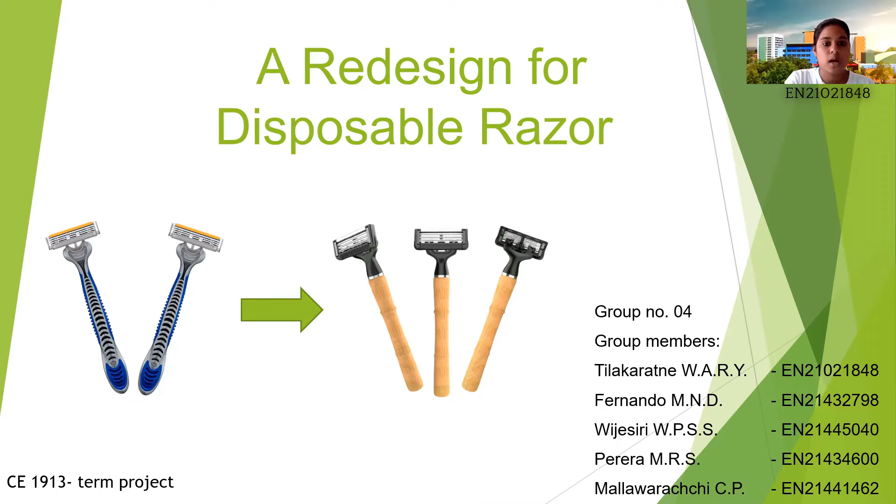If I ask you a question, what is a razor? A razor is a keen-edged cutting instrument which is used for shaving and cutting unwanted hair on humans' bodies. This was invented by William Henson in 1847 and developed to the standard which we can see today.

When the time period of usage is over, it has been disposed of or thrown away, and this has become a threat to the environment. So the importance of the project we have initiated is to give you a creation which is long-lasting and environmentally friendly.

Moving to the next slide, we all know that there are two main parts of the razor: the handle and the blades.

As you can see, the plastic part of the handle consists of polystyrene and polyphenylene oxide, which includes 8 to 12%, and polypropylene, 35 to 45%. The rubber part consists of 2-methyl-1,3-butadiene, which includes 8 to 12%, and all four are renewable.

In the blade, chromium gives you 12 to 14%, all the other elements only include below 1%, and every metal is non-renewable. The packaging is done by cardboard, which includes only 7%, and it is renewable.

The properties of the elements are corrosion resistance, toughness, and lightweight. Corrosion resistant means the ability to withstand the falling of natural properties of materials in the presence of high levels of moisture. Toughness gives you the meaning of the capability to hold the shape of the blade without deforming or bending.

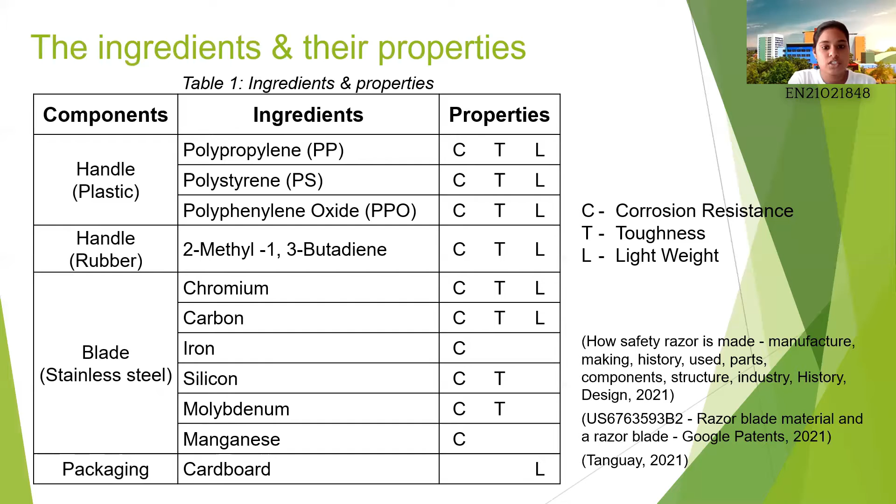Lightweight helps us with ease of handling. The next slide is about how the manufacturing process is being done. Over to you, Netra.

Thank you, Ravindi. So while we are talking about how disposable razors are made, there are three main steps available: handle manufacturing, blade manufacturing, and assembly.

In the handle manufacturing part, first the raw materials such as polystyrene, polypropylene, and polyphenylene oxide are heated at high temperature. Second, this heated mixture was injected into molds. After cooling these molds, the handles were formed.

However, as a result of heating these materials, methane and carbon dioxide gases were released to the atmosphere. Also, scrap plastic was released to the environment as a byproduct of the injecting process. Moving to the next slide.

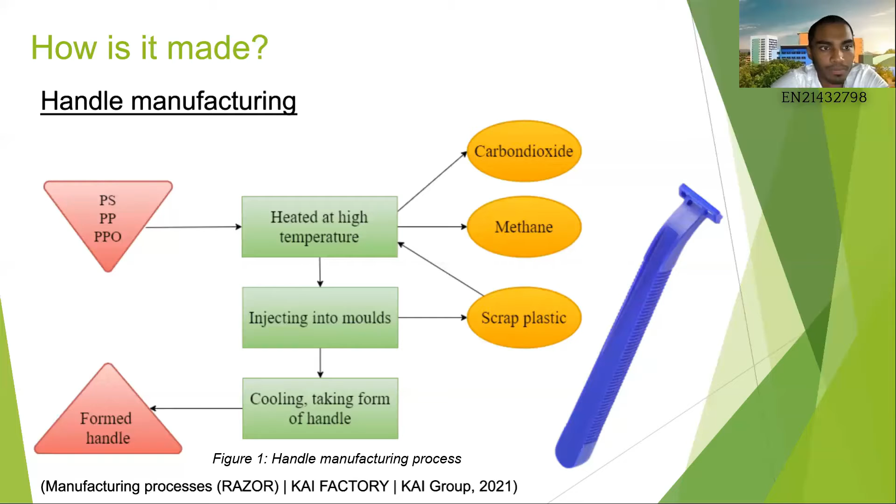In the blade manufacturing part, the first step is heating raw materials at high temperature. Here, molybdenum, chromium, iron ore, silicon, and nickel are used as materials.

After the heating process, the mixture was sent through the argon-oxygen decarburization process. In this process, argon and oxygen gases were injected into the mixture. However, as a result of this decarburization process, carbon dioxide gas was emitted to the atmosphere.

Next, the mixture was formed into stainless steel sheets. After forming the metal sheets, they were sent through the cold rolling process.

In this process, sheet metal is introduced between rollers and then compressed and squeezed. Then the annealing process began, and this process was done to the metal sheet to increase its elasticity.

So after all these processes were done, the blade is formed by cutting, shaping, and surface finishing processes. But scrap stainless steel is released as a byproduct of cutting and shaping processes. Moving to the next slide.

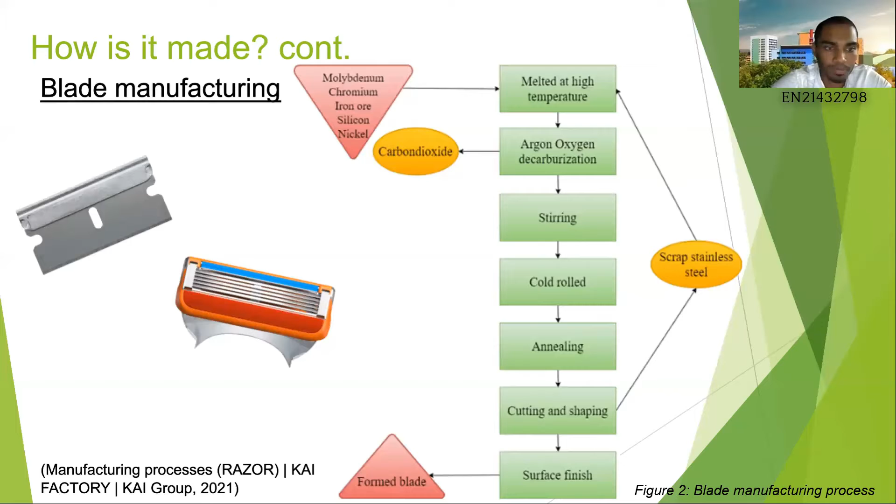So the third main step is assembling. In the assembling process, the formed handle and blades are assembled together and disposable razors are produced. Moving to the next slide.

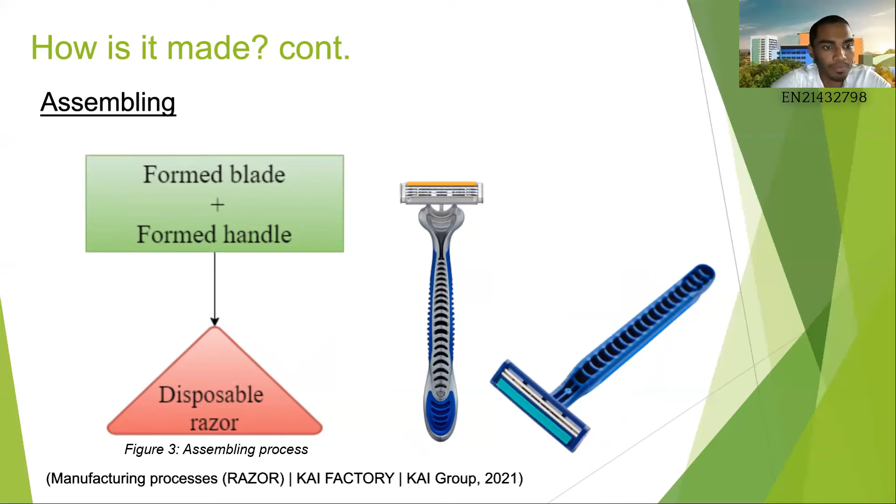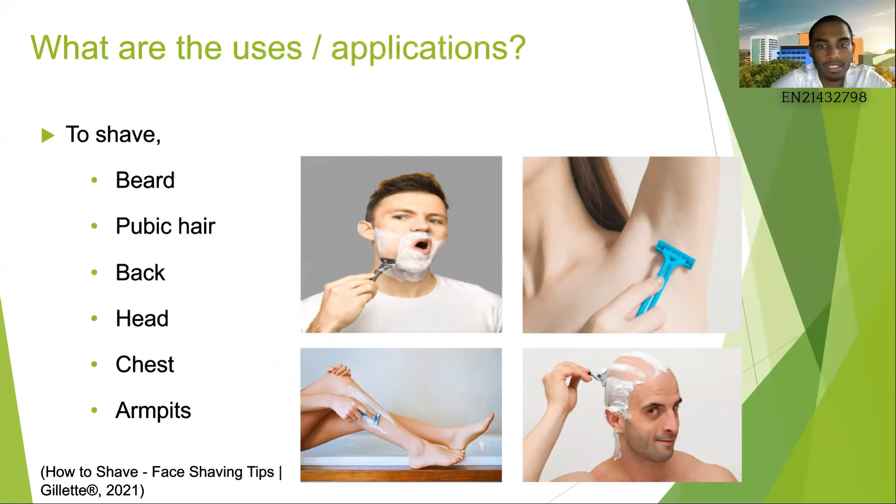As we all know, the main use of a disposable razor is shaving. However, we can use it to shave our beard, pubic hair, back, head, chest, or armpits. So I'd like to invite Sachinta to continue our presentation.

Thank you, Netra. I will explain to you the problems that can occur in each production stage of the existing disposable razor and when discarding it. Raw material extraction and processing.

Due to digging the ground to extract minerals, topsoil gets removed. Therefore, it leads to soil erosion and water sources get polluted due to not discharging wastewater properly. Resources get depleted due to a higher rate of extraction than they get replenished.

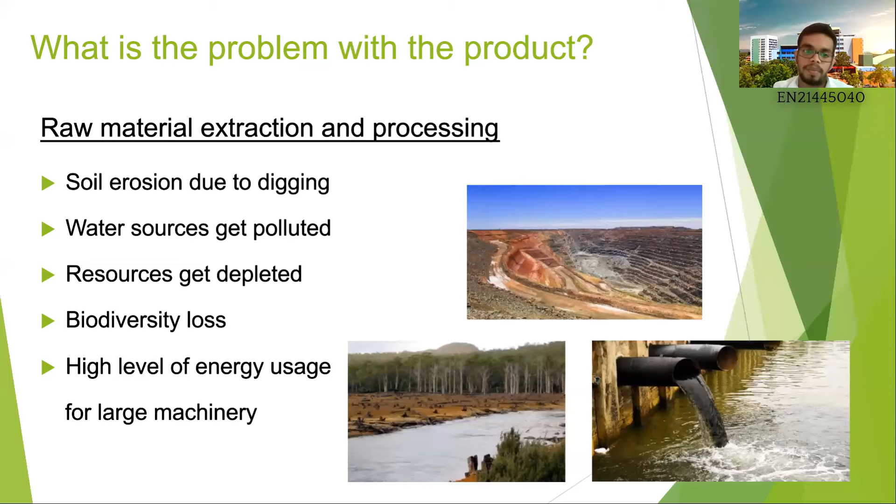Destruction of habitat is the main component of biodiversity loss, but direct poisoning caused by mine-extracted minerals and indirect poisoning through food and water can also affect animals, vegetation, and microorganisms. High levels of energy usage for large machinery during the processing of mine material. Let's look at the production of the blade stage.

Air pollution due to carbon dioxide emission from the argon oxygen decarburization process. Land pollution due to discharge of scrap stainless steel generated while cutting and sharpening the blade. The harsh noise of machines will harm animals as well as humans.

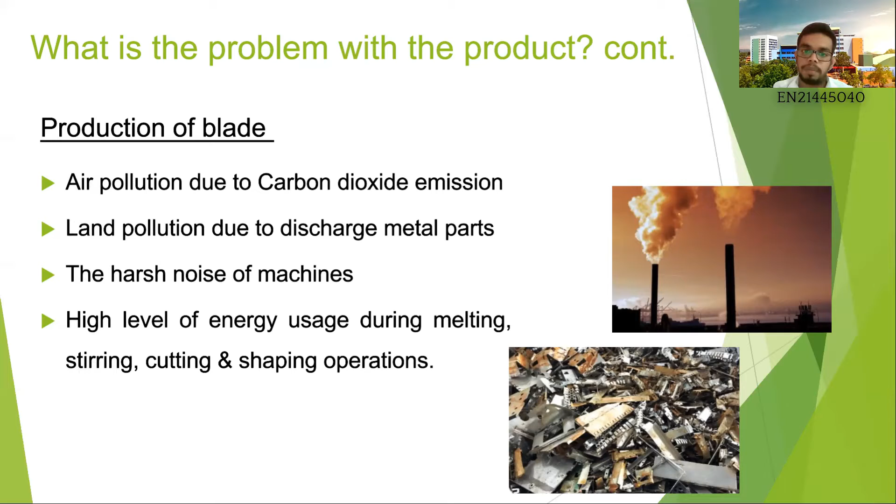As described in the above stage, high levels of energy are used here as well during melting, stirring, cutting, and shaping operations. Another important part is manufacturing the plastic handle. Let's identify the problems that arise there.

Air pollution due to carbon dioxide and methane released from the high heated raw materials such as polystyrene, polypropylene, and polyphenylene oxide. Land and water pollution due to discharged scrap plastic. High level of energy usage for heating and injecting into the mold process.

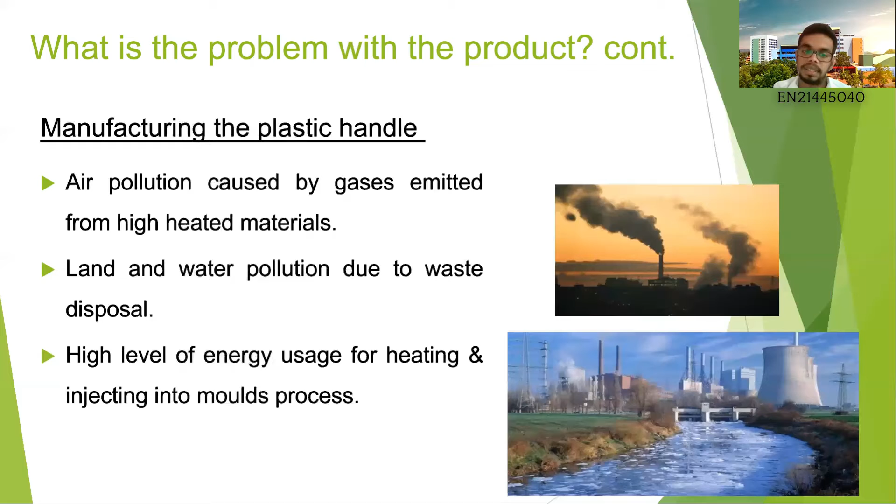Finally, we identified two major problems of disposing of the razor. Those are land and water pollution due to direct disposal of plastic parts and blades, and air pollution because of releasing toxic gases when burning plastic parts and polythene retail packages.

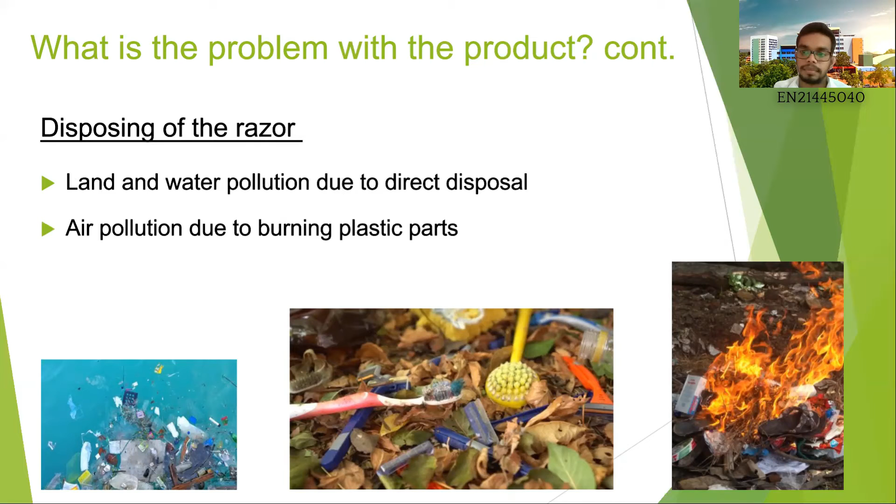Thank you, Sachinta. So what are the available alternatives to the existing product? As the first alternative solution, we suggest stiff cardboard and discarded wood for the handle. Stiff cardboard and discarded wood are fully eco-friendly materials.

Next, the lubricant strip. The lubricant strip is a small tiny part of the razor near the blades, as you can see in our slides. We hope to redesign the razor to remove the lubricant strip when it gets worn out and replace it with a new lubricant strip. This will bring the razor into the reusable level.

So moving into packaging. Retail packaging has done huge negative impact to the world. So we propose to use recyclable cardboard, organic fabrics, and biodegradable packaging to minimize the harmful effects done to the environment. Our main aim is to minimize the amount of solid waste dumped into the environment.

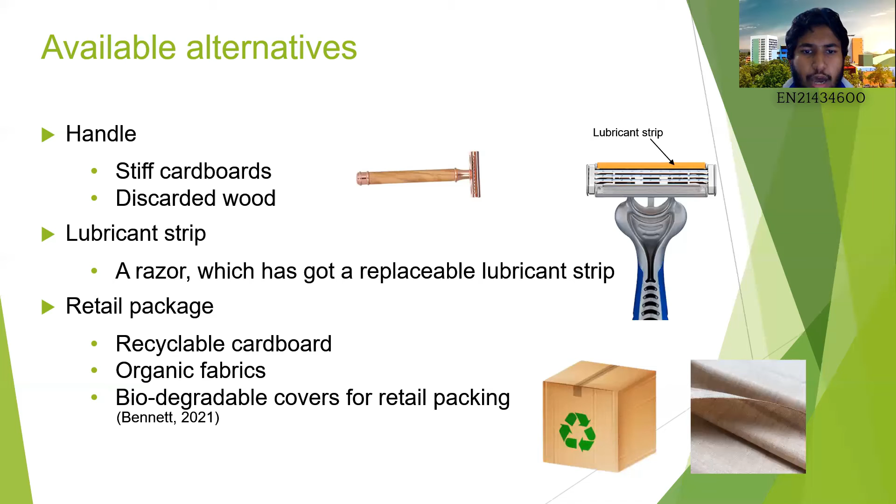So moving into the proposed alternative slide. Basically, we are planning three alternatives. We hope to replace the plastic handle with discarded wood. Why did we choose this alternative? Mainly, disposing of plastic scrap adds more waste to the land and water.

Also, we plan to replace the lubricant strip. It will be beneficial economically and will reduce environmental pollution. Now we will see how it affects the environment. When we extract raw materials, it directly affects soil erosion and water resources.

At last, we're trying to use biodegradable packaging rather than retail packaging. Biodegradable packages are compostable. This also minimizes the toxic gases added to the atmosphere due to the burning of polythene and reduces the non-perishable waste added to the environment.

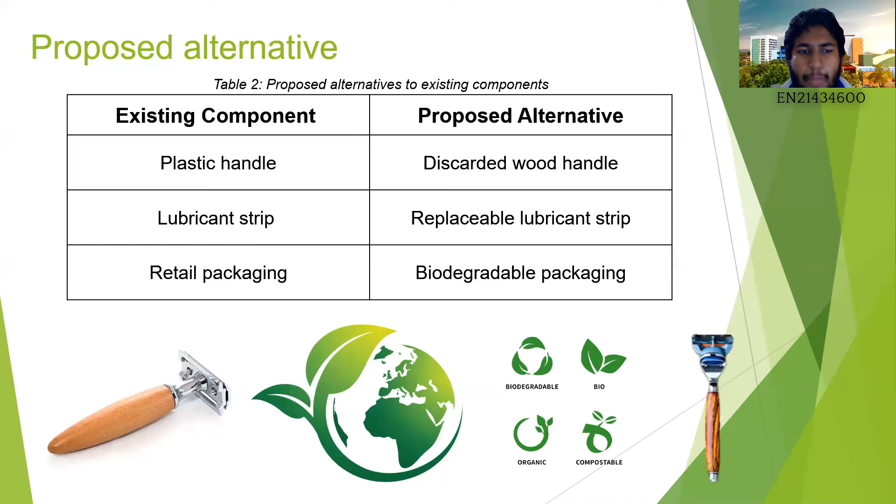Thank you, Ravin. As we have arrived at the end of our presentation, I would like to share a few key points of using the alternative solution. The main purpose of using a razor is to have a clean shave, and the existing razor does that job excellently. But we identified two main issues with the existing razor: short lifespan and less sustainability.

The main reason for the short lifespan is that the lubricating strip loses its ability to lubricate after a few shaves, so we have to throw the razor away. And using plastic for the handles and polythene for retail packages makes the existing razor unsustainable.

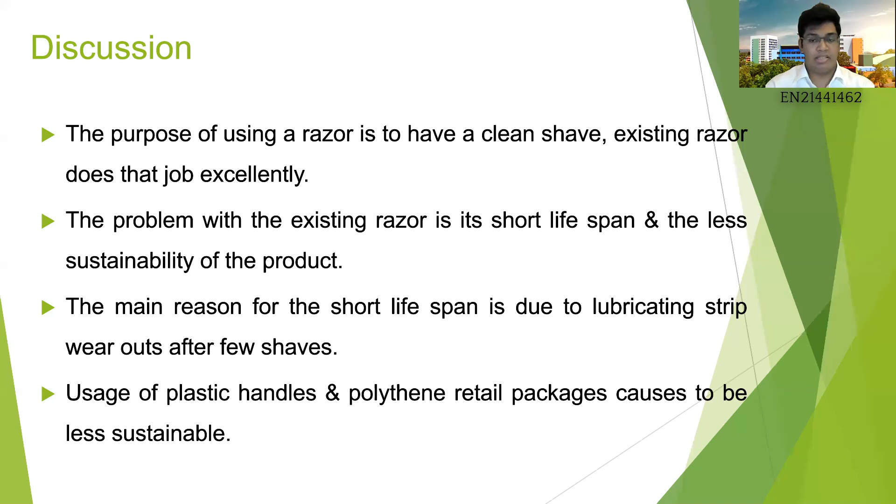Let's talk about the benefits of using discarded wood handles. As discarded wood is a waste product of another industry, it will help reuse waste. Also, this will reduce plastic usage, making it eco-friendly, as there are many negative impacts on the environment from plastic, such as land and water pollution due to discharge of scrap plastic and release of toxic gases when burning plastics. And as wood decomposes faster than plastic, we would be able to dispose of the razors without heavily impacting the environment.

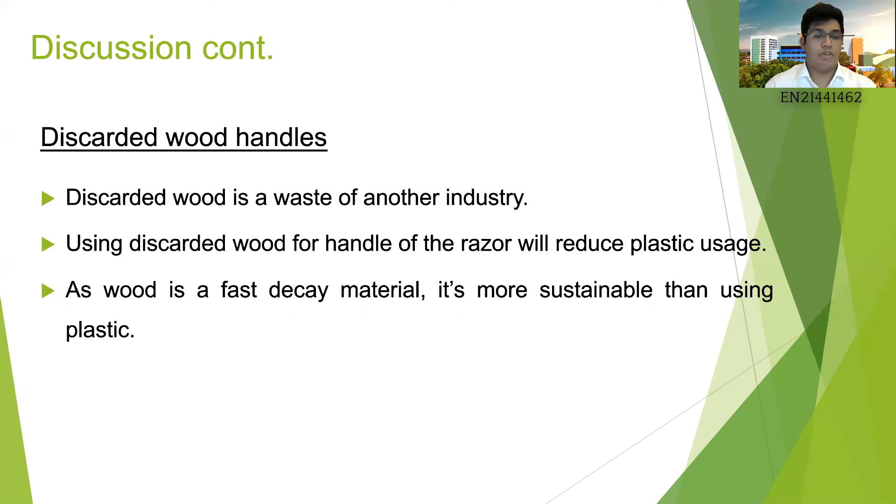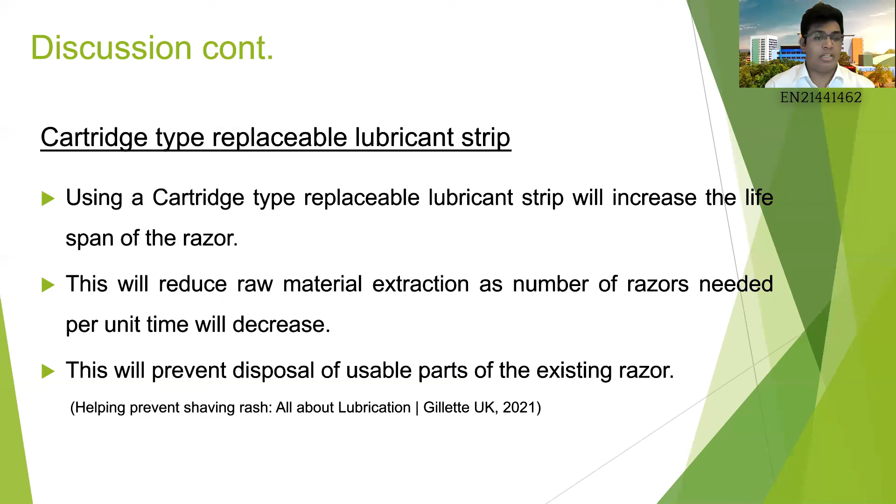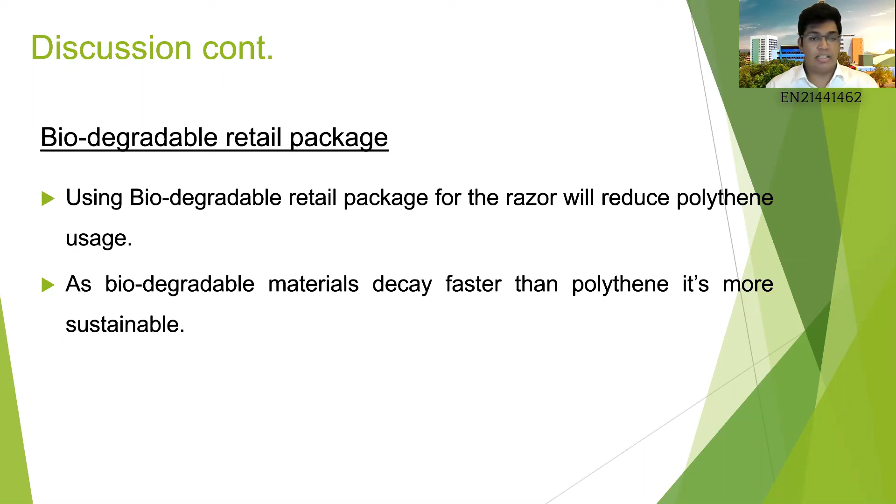As a conclusion, I would like to say the alternative solution performs the same as the existing razor, as we didn't make any changes to the blades of the razor, while being more sustainable. So the alternative solution will help reduce the environmental impact created by the existing razor.